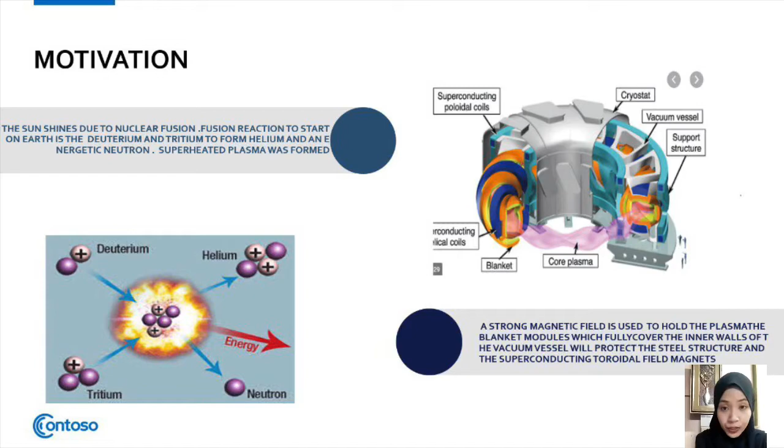So MHD comprises the study of electrically conducting fluid and also the magnetic properties. And the motivation of this project is that nuclear fusion can be the perfect source of energy. It begins when two hydrogen isotopes are combined, which are deuterium and tritium, in order to produce helium and a neutron. So at high temperature, the superheated plasma is formed, and then the superheated plasma is confined by the

strong magnetic field. From this diagram, we can simply understand that at high temperature, the superheated plasma is formed, and the superheated plasma is transformed to heat energy, and heat is absorbed by the blanket and transferred to the heat exchanger by the coolant. And from the heat exchanger, it can generate electric current. But the problem here is at the heat exchanger, where due to the strong magnetic field, the flow in the heat exchanger becomes steady.

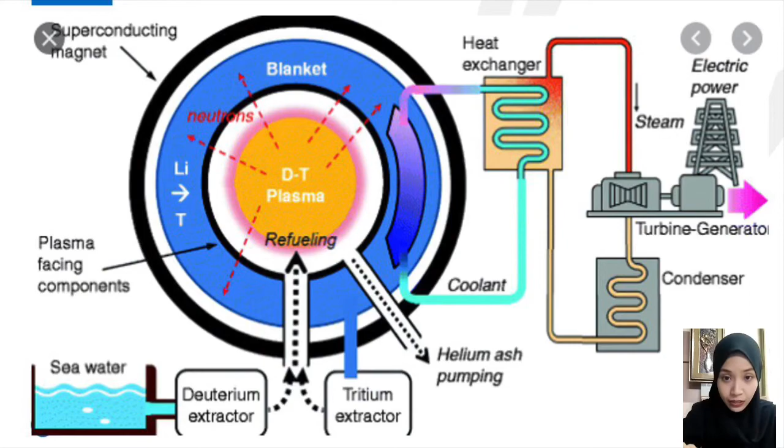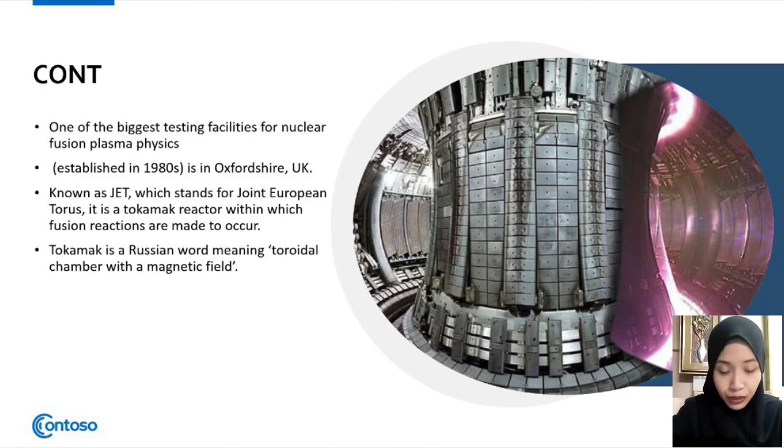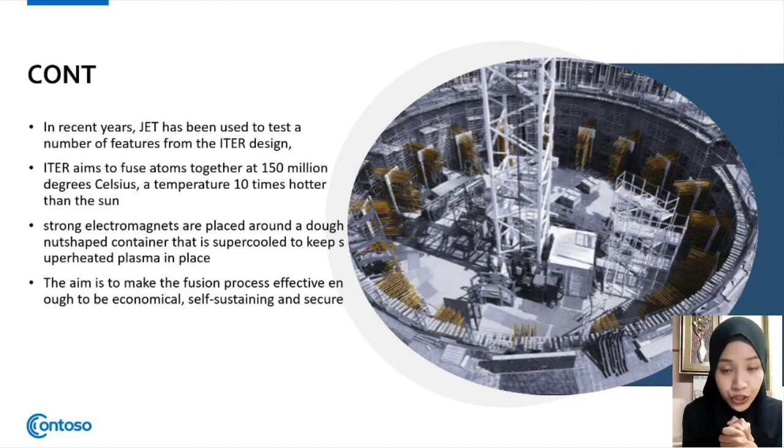So the biggest fusion reactor facility is known as JET, but JET cannot be used for certain areas. And then the structure and design of JET is used for ITER, whose aim is to fuse atoms together at high temperature, which is 10 times hotter than the sun.

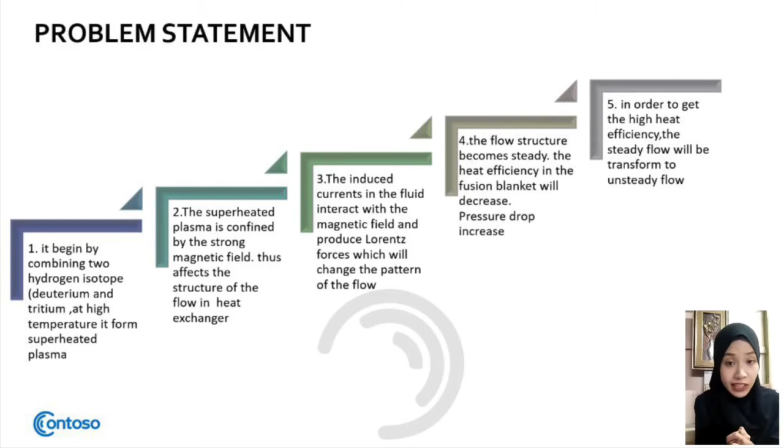So the problem statement of this project: first, the two hydrogen isotopes are combined together, and at high temperature the superheated plasma is formed and confined by the strong magnetic field, which will affect the structure in the heat exchanger. Then the induced current in the fluid interacts with the magnetic field and produces the Lorentz forces. The Lorentz forces can change the pattern of the flow, and the flow structure becomes steady. And when the flow structure becomes steady, the heat efficiency decreases, thus the pressure drop increases.

So in order to increase the heat transfer efficiency, we have to transform the steady flow to unsteady flow. That's why for my project, I'm going to study the flow past two circular cylinders in staggered arrangement. When the steady flow passes the cylinder, it will become unsteady flow.

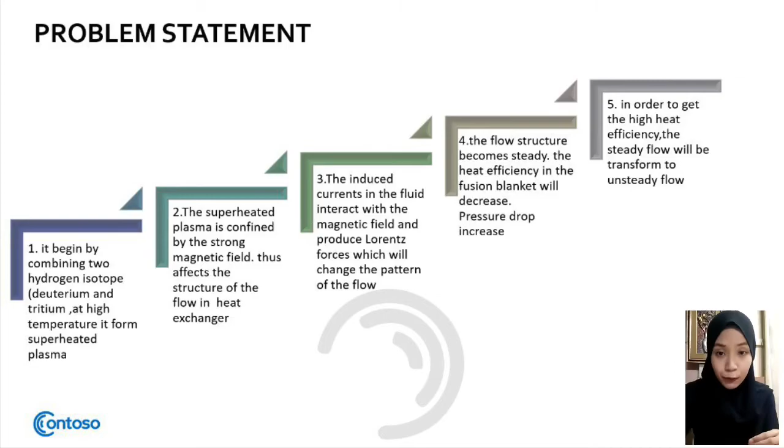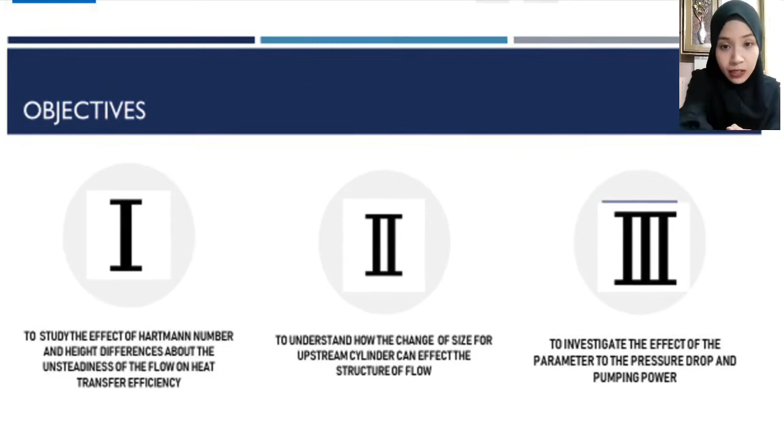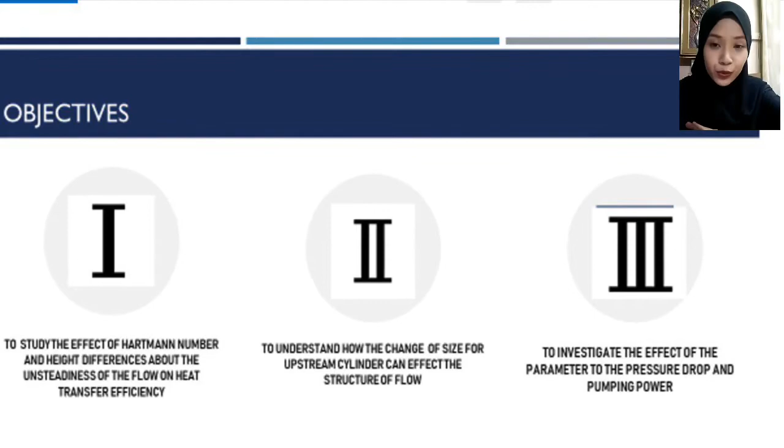And the objectives of this project are: first, to study the effect of the Hartmann number and height differences on the unsteadiness of flow and heat transfer efficiency. The second one is to understand how changing the size of the upstream cylinder can affect the structure of the flow. And the third one is to investigate the effect of the parameters on the pressure drop and the pumping power. So this is the research question.

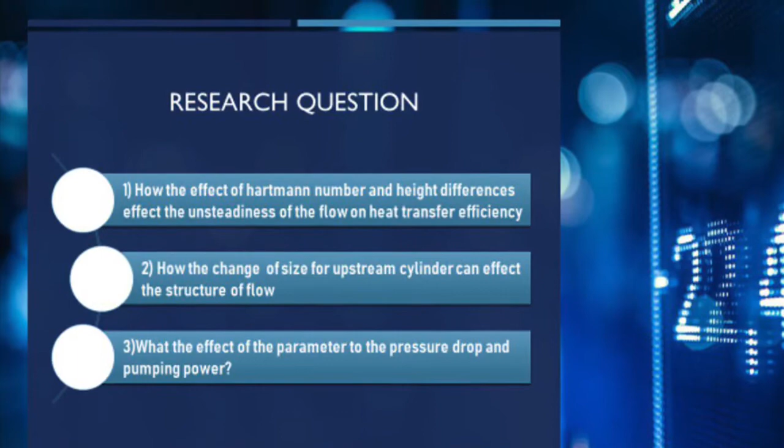Next is the literature review. The first one is the effect of MHD on the cooling blanket by Ben Hadid, which showed that the magnetic field stabilizes the flow, where the flow becomes steady. The second one is the relation to the Reynolds number from Qian and Peng, where the flow becomes steady at low Reynolds number and becomes chaotic as the Reynolds number increases. Number 3 is the Hartmann number, showing that the pressure loss depends on the Hartmann number. When the Hartmann number is increased, the pressure loss also increases.

And then the flow past multiple cylinders from Verma and Govardhan, where when multiple cylinders are arranged, there was a big change in the characteristics of the fluid structure, due to the interference effect between the cylinders. So in this study, I'm going to study the flow past two cylinders, because the flow past two cylinders can provide a better understanding of the vortex dynamics.

Number 5 is the effect on heat efficiency from Talmage, which concluded that heat transfer can be improved by having turbulence or unsteady flow. So in order to increase the heat efficiency, we have to convert the steady flow to unsteady flow.

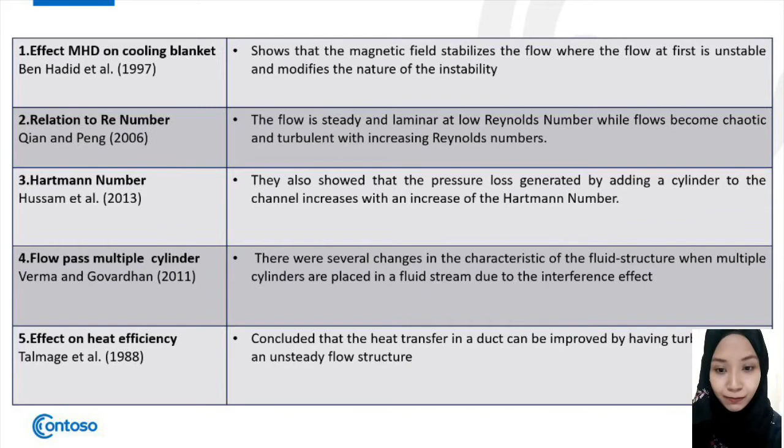And then the next one is the effect on the pressure drop. Matsuzaki, Umeda, and Takahashi have the same opinion, where the amount of the pressure drop really depends on the Hartmann number. So the stronger the magnetic field, it will make the heat efficiency decrease, thus the pressure drop will be increased.

And then number 7 is the flow past bluff body. This is just like the other opinion about the other bluff bodies, where the Virahsawmy study is about three cylinders that have been arranged side by side, where the gap flows were unstable and constantly reorienting, which had the effect of restructuring the wake flow. This can also be related with the interference effect just now when multiple cylinders are added.

And then number 7 is Zdravkovich, where in the case of the square section, the rectangular cylinder with a square section is the prime example of sharp-edged bluff bodies, where the result is the separation location is fixed at the sharp edge. Sharp-edged bluff bodies do not actually depend on the Reynolds number.

So number 8 is the two cylinders in staggered arrangement. Mital and Kumar said that the staggered arrangement generally provides a higher pressure drop and also a higher heat transfer coefficient than the inline arrangement.

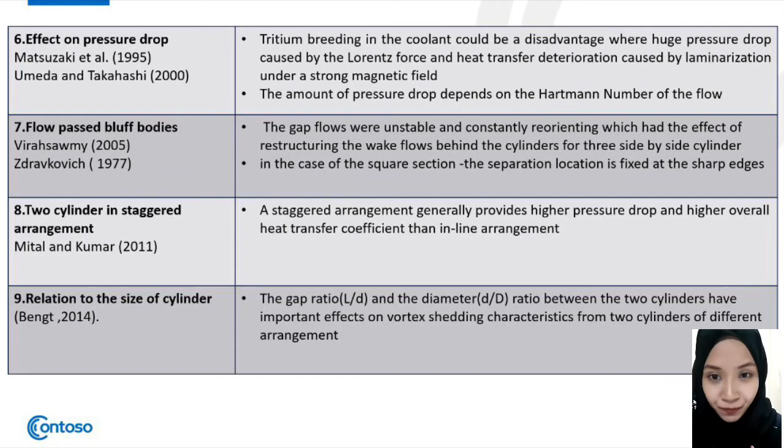This is my flow plan, where the computational fluid dynamics was set up, and then the validation was done with regard to the previous paper. And then we will run the simulation using OpenFOAM with parameters such as the height and length of the channel, the inlet velocity, and also the Reynolds number. And then the manipulated variable, which is the variable that can be changed in this case, is the height differential and also the size of the upstream cylinder, in order to obtain the structure of the flow, the effect on the heat efficiency, and also the effect on the pressure drop.

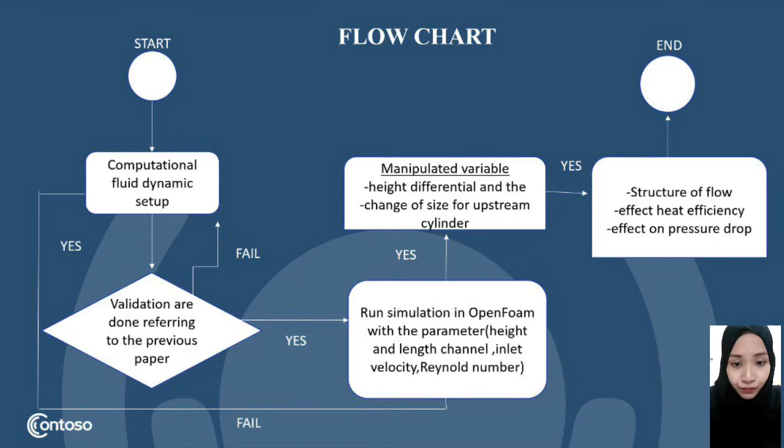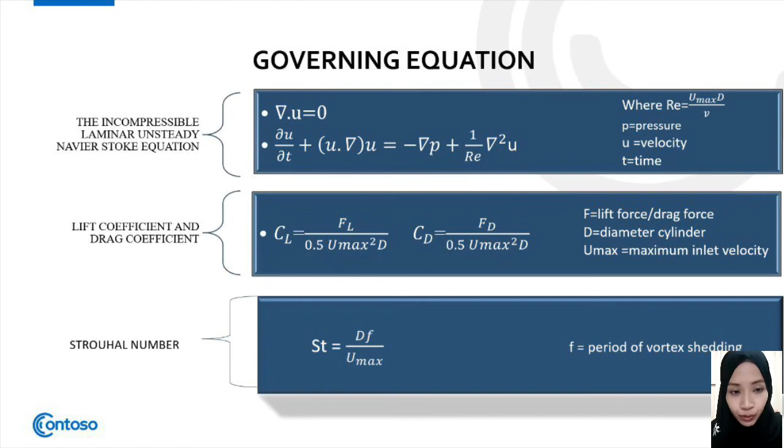First, the methodology. We begin with the governing equations related to my case, which is the incompressible laminar flow 2D model. The first equation is the incompressible laminar unsteady Navier-Stokes equation, where Re is the Reynolds number equal to U max D over nu, where U max is the maximum inlet velocity, D is the diameter of the cylinder, and nu is the kinematic viscosity. Number 2 is the lift coefficient and drag coefficient, where F equals the lift force and drag force. Number 3 is the Strouhal number, where F equals the period of vortex shedding.

Equation number 4 is for the magnetohydrodynamic momentum equation for the 2D model, where H is the friction term representing the Lorentz force effect on the flow. Number 5 is the energy equation, where T equals temperature and Pr is the Prandtl number. And the last one is the Prandtl number, where Cp equals specific heat, K is the thermal conductivity, and mu is the dynamic viscosity.

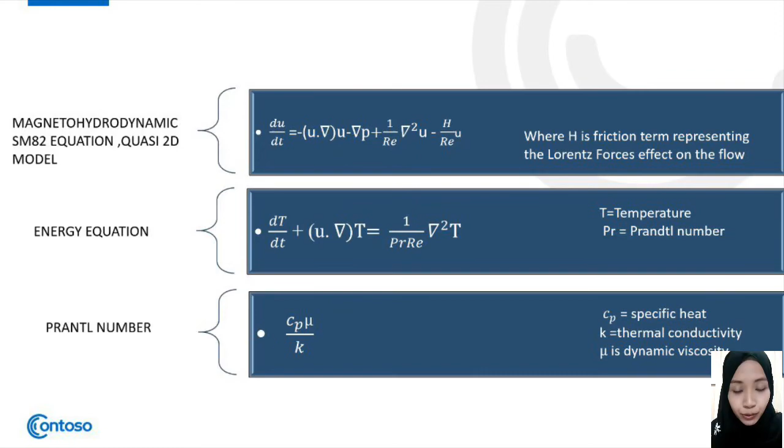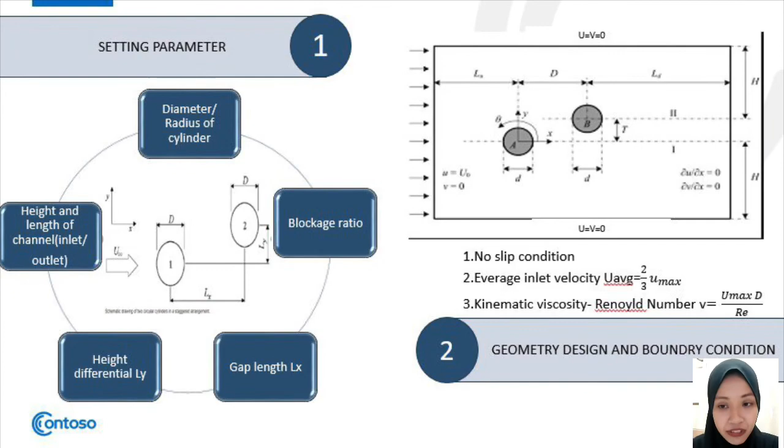The first method is setting up the parameters: the diameter and radius of the cylinder, the height and length of the channel, the height differential, the blockage ratio, and the gap length. Number 2 is the geometry design. We design the geometry referring to the parameters just now, and we have the boundary conditions for these cases. The first one is the no-slip condition at the top and bottom walls. Number 2 is the average inlet velocity, which we calculate using the formula 2 over 3 times the maximum inlet velocity. Number 3 is the kinematic viscosity, which is related to the Reynolds number.

And then method number 3 is meshing. We do the meshing using the software Gmsh. And number 4 is the simulation software. In simulation, we use the OpenFOAM software, and the output will be displayed in ParaView.